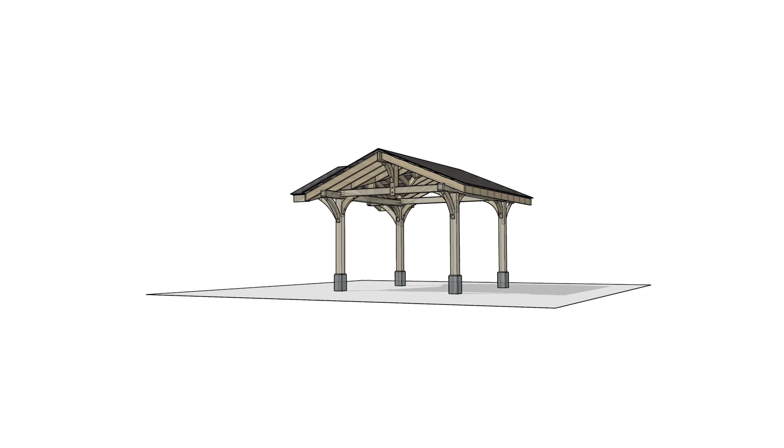My good friend Connor and his wife Sarah asked me to help them build a pavilion in their backyard. They wanted a timber frame 3-gabled structure, so I modeled up a design in SketchUp and drew up some plans.

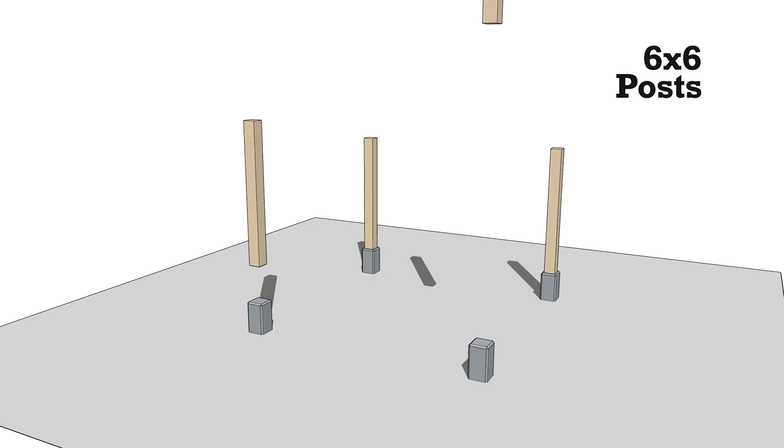The posts will sit on formed concrete piers. There are 2 beams running north to south and 2 beams running east to west. Corner braces add rigidity to the frame at the intersection of the beams and posts. The pavilion is made from Douglas fir that's rough sawn full dimension from a local sawmill.

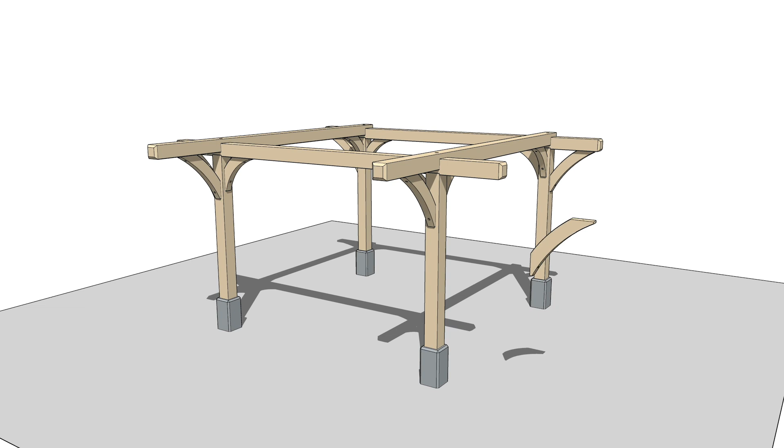King posts sit mid-span on the beams and support the upper ridge beams. Valley rafters run from the peak to the corners and support the jack rafters. Common rafters finish the gable ends and the west-facing roof slope.

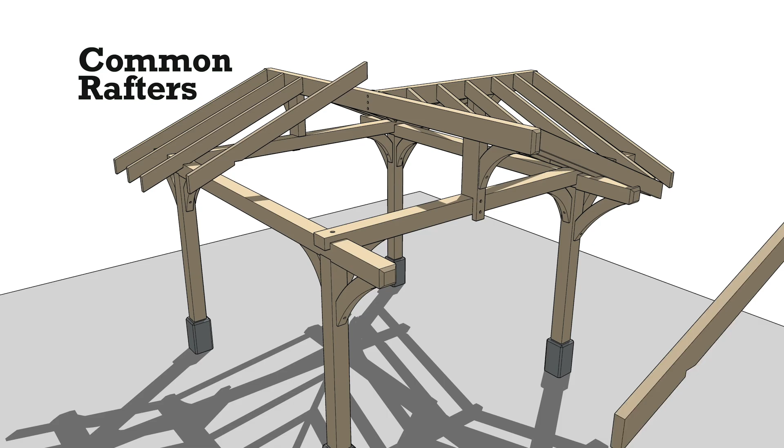Strapping is laid over these rafters and over the jack rafters on the northeast and southeast corners. The roof is finished with plywood, then metal sheeting.

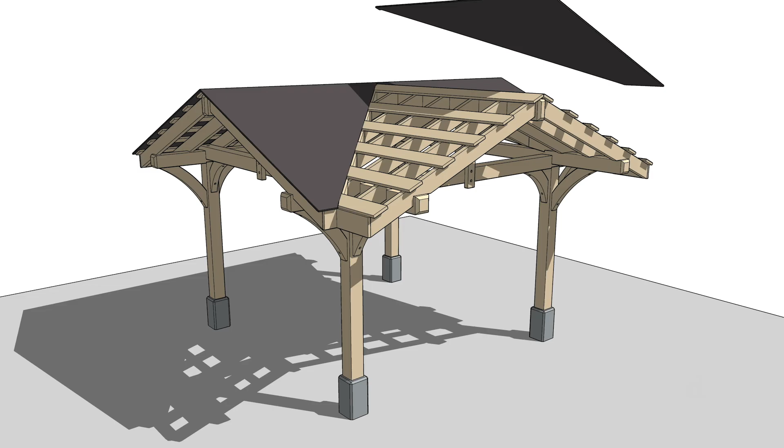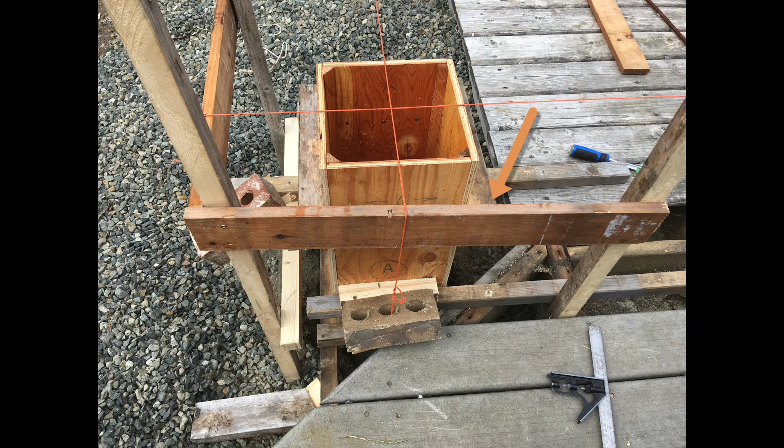We cut into Connor's deck and built batter boards to lay out the footings and concrete piers to support the structure. I used a string drawn over the ledger boards to locate the center of each post. The strings are kept taut with bricks, and can easily be adjusted or pulled out of the way if needed. The string lines are squared so the posts are 10 foot by 10 foot on center.

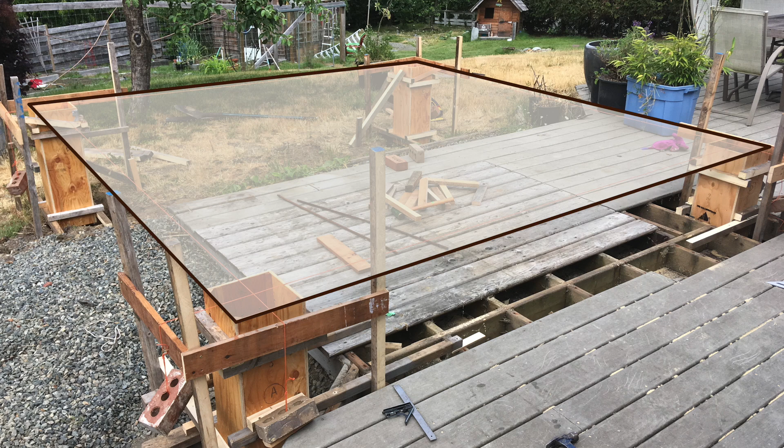I leveled the tops of all the forms so they would be on the same plane, using a laser level to help with this. The posts sit on adjustable galvanized saddles attached to an anchor bolt that's embedded in the concrete.

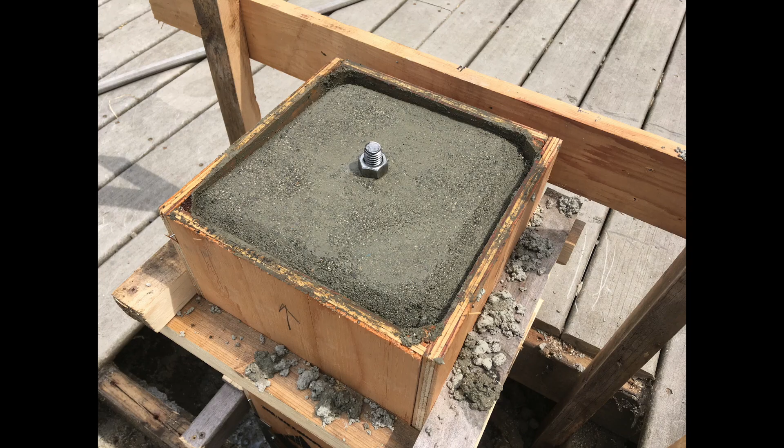The plywood forms are coated on the inside with vegetable oil, then cement is poured in. They are covered with plastic and left to cure for several days. The screws are then removed and the forms are stripped.

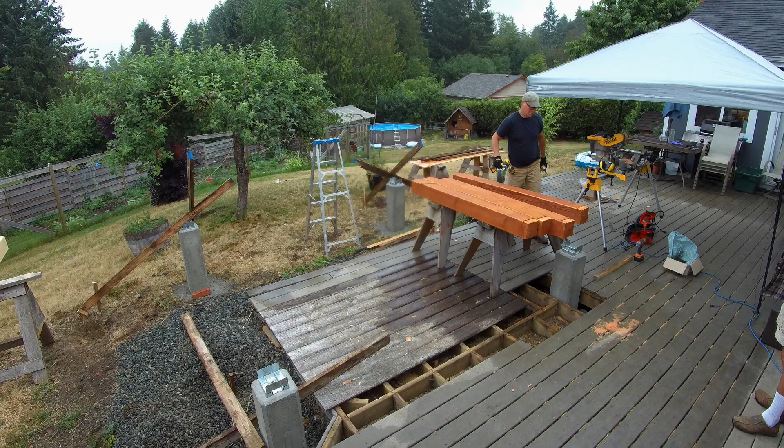I shot time-lapse for most of this build. The posts are cut to length and screwed to the saddles, plumbed and held in place with temporary braces.

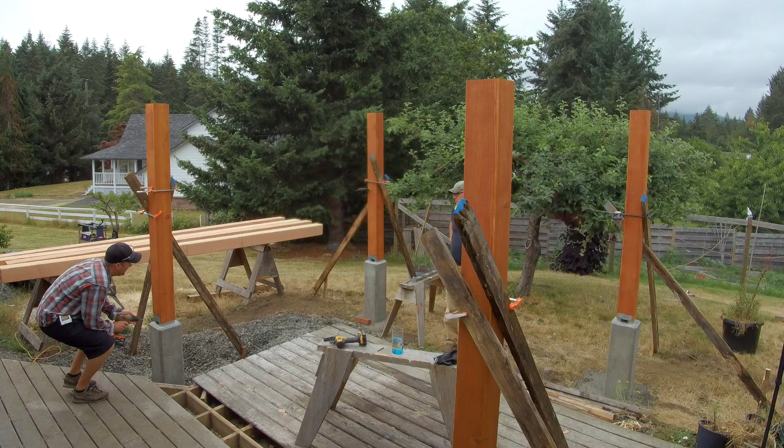The 4 6x6 beams are laid on sawhorses while I check the spacing of the posts with a tape measure. I also double check that they are plumb before I lay out and cut the first beams.

The north-south set of beams have a 45-degree chamfer on each end and 2 opposing grooves. The upper groove is 2 inches deep and the lower groove that sits on the post top is 1/2 inch deep. With the posts in their final position, I cut the north-south beams to length with a circular saw.

Next I lay out the upper 2-inch groove, and Connor makes a series of thin slices into the beam with a circular saw. These are then broken off with a hammer, then the groove, or lap, is cleaned up with a chisel.

I lay out and cut the shallower groove on the opposite side of the beam in the same fashion as the first grooves. These 4 grooves are then cut into the other beam.

The chamfers in the ends of the beams are cut with a circular saw set at a 45-degree angle. A large square is used as a guide.

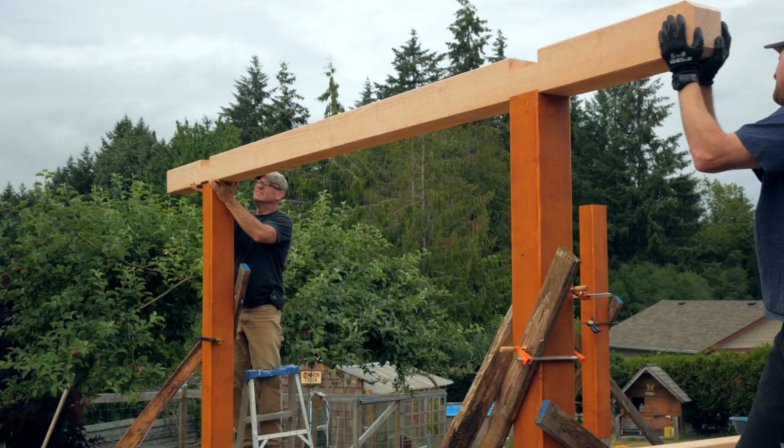The first beam was lifted into place, but the groove on my end was too tight, so we brought it back down and trimmed it a bit. We tried it again, and this time it fit. A few screws will hold the beam in place for now.

The chamfers are cut on the ends of the next beam, then it's lifted into place.

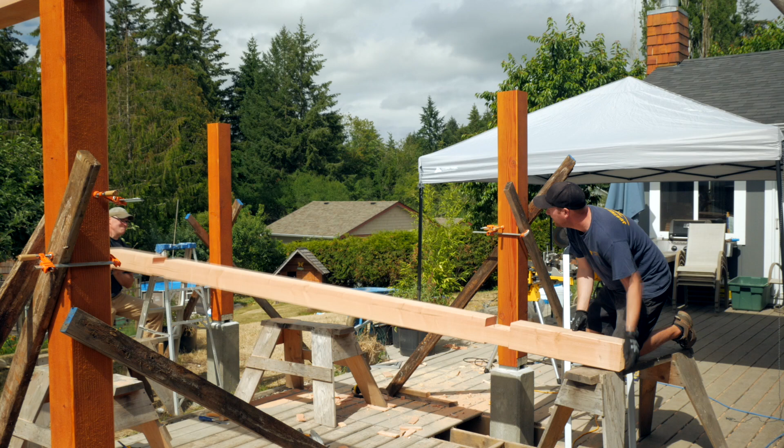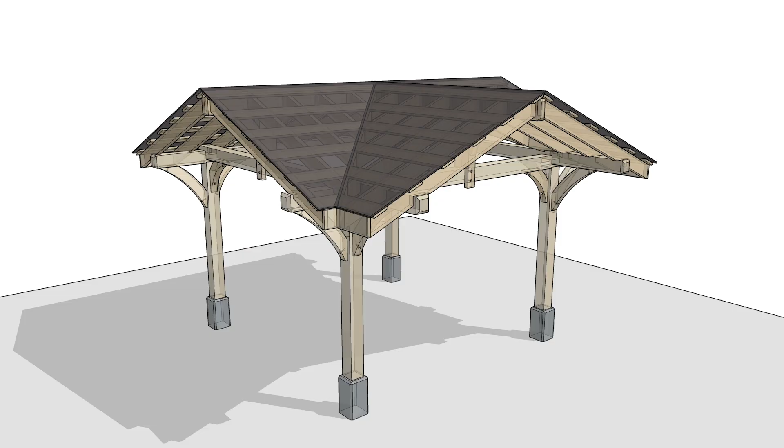The east-west beams have a 2-inch deep lap that is open on the west end. Grooves on the other end will fit tightly over the north-south beams. Countersunk holes are drilled in so a long lag bolt can secure the 4 beams to the posts.

Measurements are double-checked, then these beams are laid out. They are cut to length and the grooves cut as before. The east ends are chamfered in the same manner as the other beams.

The first beam is brought up and laid over the 2 north-south beams, then slid over and into place. My end didn't fit, so we lifted it back out.

I grabbed a taller ladder and a circular saw and opened the groove up a bit. Then this beam fell in nicely.

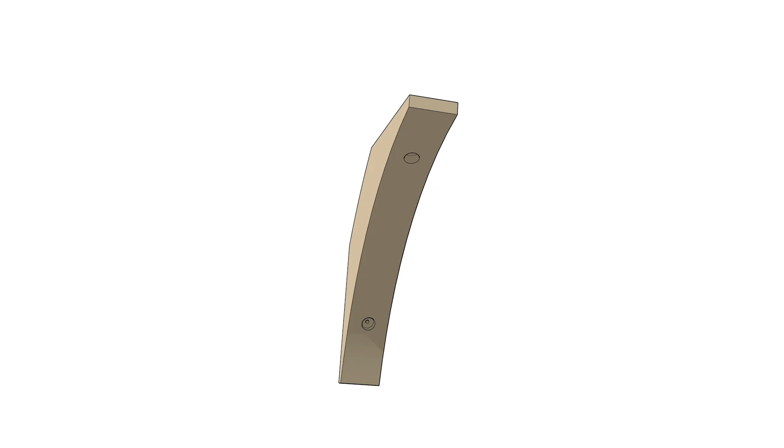For this structure I designed 2 similar braces. For the inside corners I have a small curved brace. These are made from 3-inch thick stock.

Connor's neighbor, BJ, was kind enough to let us use his shop to make the braces.

Beforehand, I made 2 plywood patterns for the brace designs. Here, Connor is tracing the outline of the smaller brace onto stock, and trying to avoid any knots if he can.

He cuts 2 opposing 45-degree angles on the miter saw, finishing each cut with a handsaw where the circular blade didn't reach.

I took these to the bandsaw to cut the curves. On the sander, we smooth off the rough spots left by the bandsaw.

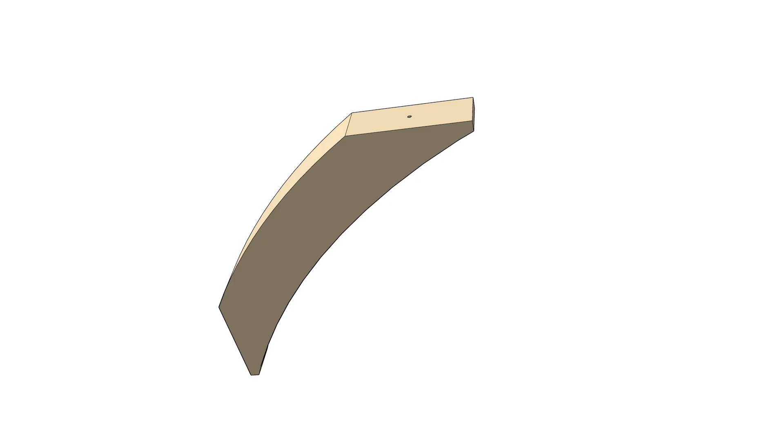The outside braces are slightly larger. As before, the pattern is traced and the angles cut.

There's a small 90-degree cut in the corner, done on the miter saw as well. These two are taken to the bandsaw to cut the curves, then onto the sander for finishing.

Stops are clamped to the drill press table and it's tilted 20 degrees. First, a Forstner bit is used to countersink the head of the lag bolt that will secure the brace to the post and beam. Then the bit is swapped out and holes drilled clean through the brace.

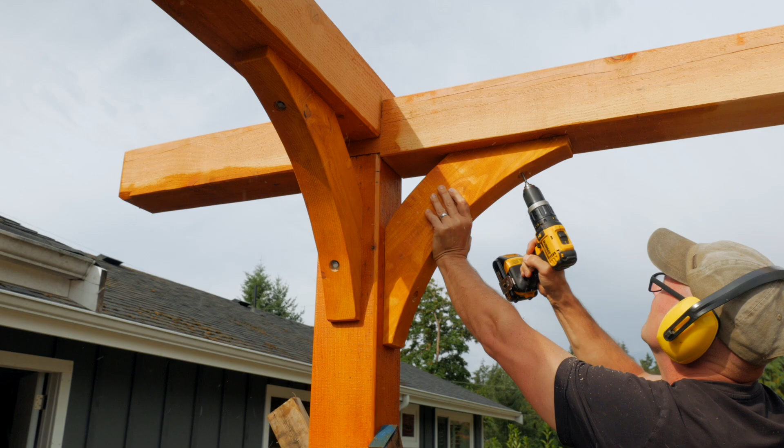After staining, the braces are held in place and holes drilled with a long bit into the beam and into the post.

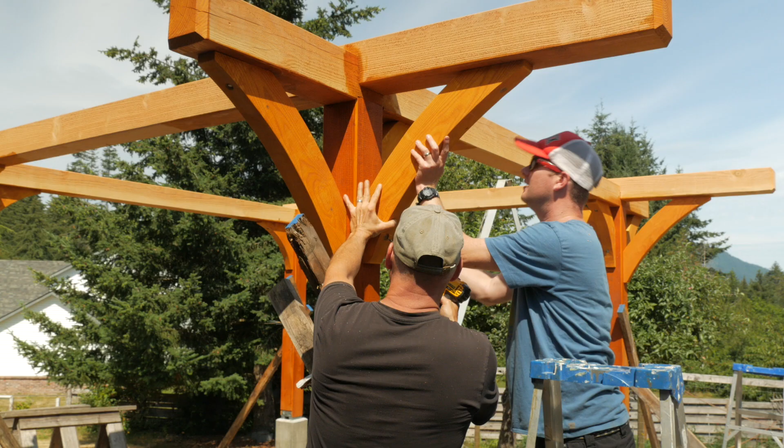Long galvanized lag bolts are run in with an impact driver, then hand tightened with a socket wrench to prevent thread rip-out. The larger outside braces are easier to install with some help.

Next, we make the king posts and attach them to the beams with lag bolts.

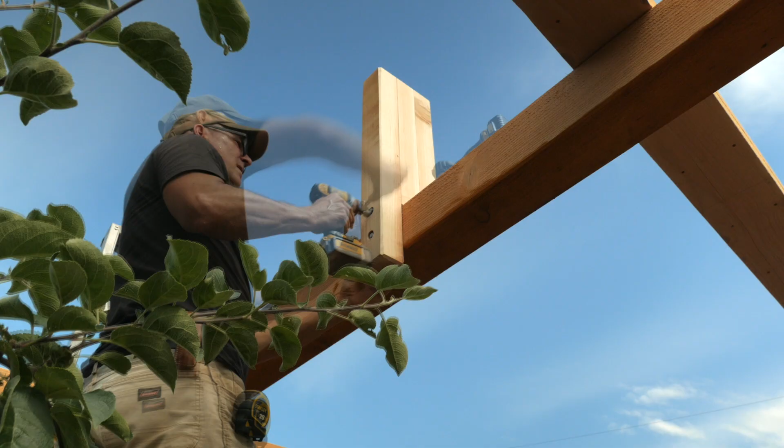The north-south ridge beam is brought up and laid across the east-west beams.

The last two king posts are secured, then the ridge beam is lifted into place. Then a small corner brace is added between the king post and ridge beam.

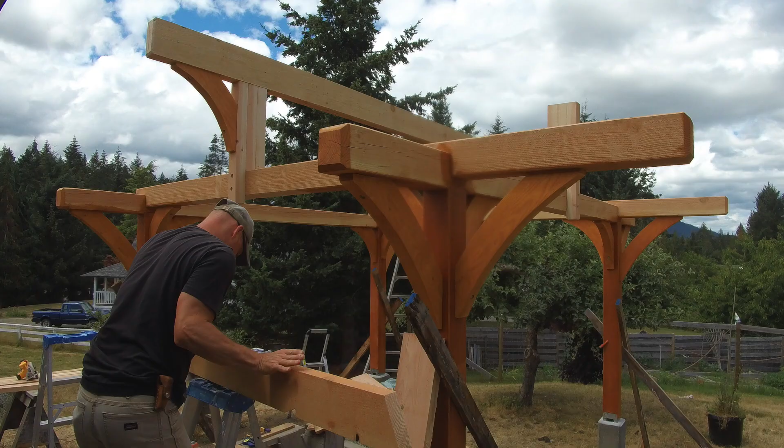Next, 4 rafters for the south and north gable ends will be installed. I put these in place now to help secure the ridge beam so it won't move laterally when the next ridge beam is installed.

These rafters are cut to length and have plumb cuts on both ends. They are then positioned against the ridge beam and laid over the north-south beams to mark the bird's mouth cuts. They are secured to the beams with screws.

The king post on the east-facing gable end needed some adjustment, to ensure it was plumb and square before the next ridge beam was placed.

The shorter east-west ridge beam is hauled up and bolted into place. Connor then stained the rest of the frame.

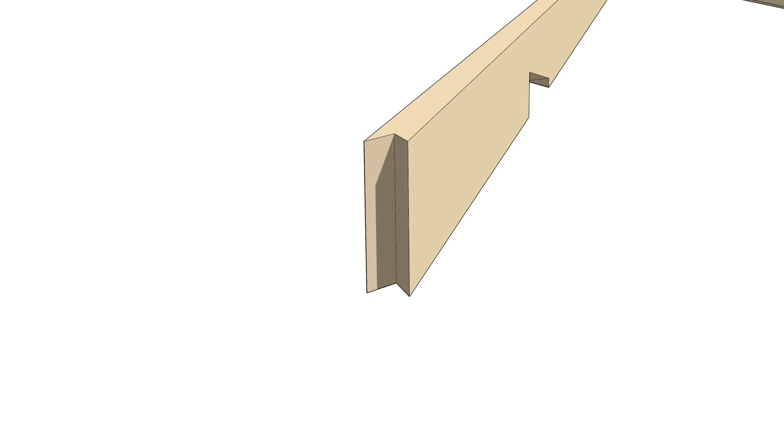Next, the valley rafters are cut. They have plumb cuts in either end and ideally a V-groove cut in the lower end for fascia boards. Then an angled bird's mouth where it sits over the intersection of the beams, and 45-degree angles cut in the upper end where it sits in the corner of the two ridge beams.

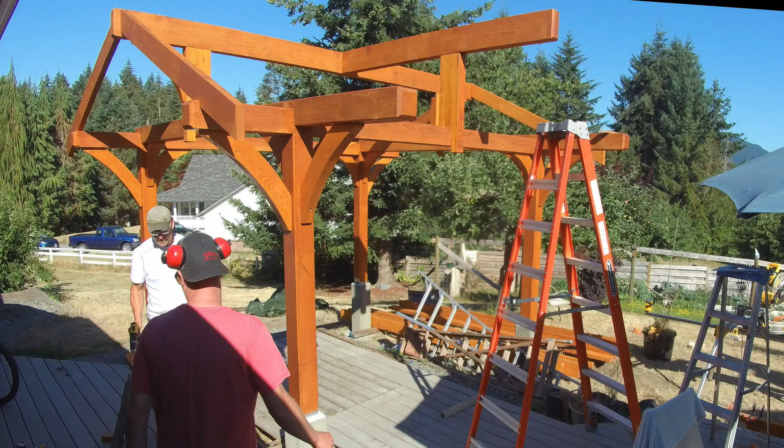4 rafters are installed on the east-facing gable end. Like the other gable ends, it's done first to stiffen the structure before the next step.

Valley rafters are tricky, and I have one chance to get them to fit right, so I took my time. I ended up hauling them up and down quite a few times before they were done and screwed into place.

At the same time, Connor installed the common rafters across the west end of the pavilion. With the valley rafters in place, we called it a day.

Jack rafters connect the ridge beams to the valley. The ends are plumb cut square to their face where they connect to the ridge beams, then a plumb cut at a 45-degree angle where it mates with the valley rafter.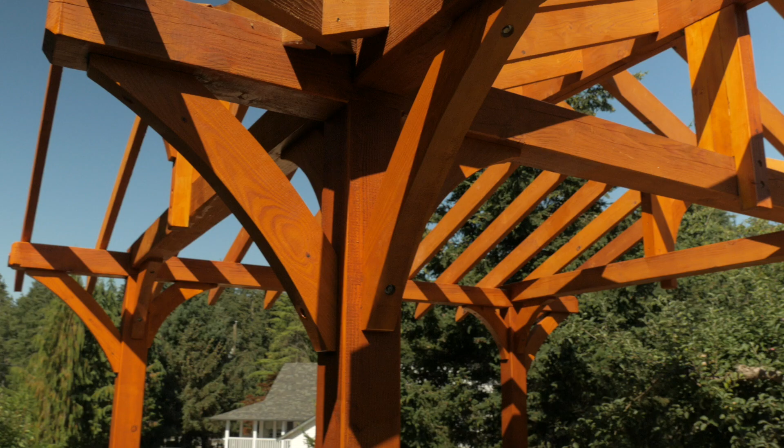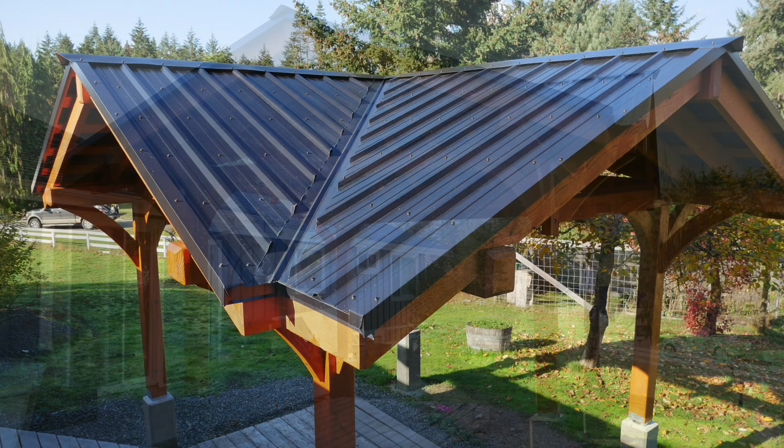And that's the principal framing done. Connor worked on his own to add fascia boards and all the roof strapping. Initially, we planned to roll out tar paper over the strapping before adding the metal roof, but Connor decided to use plywood instead.

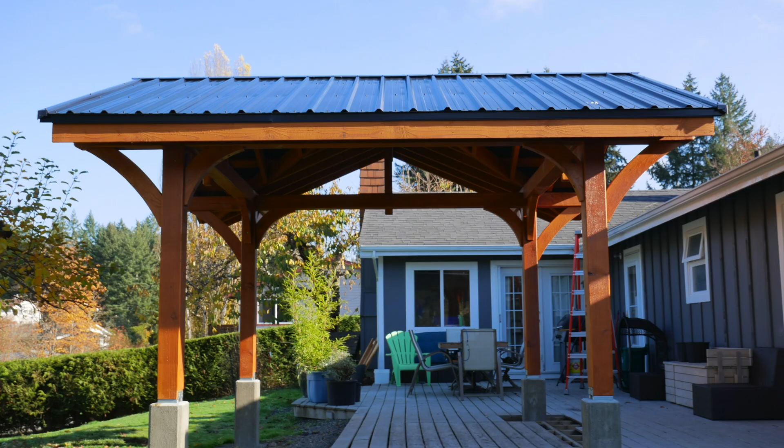He painted it flat black first before installing it, and I think it looks great. It adds a nice contrast against the stained fir. I came back to help finish the metal roof and add the trim. Later, Connor plans to extend the deck to the north.